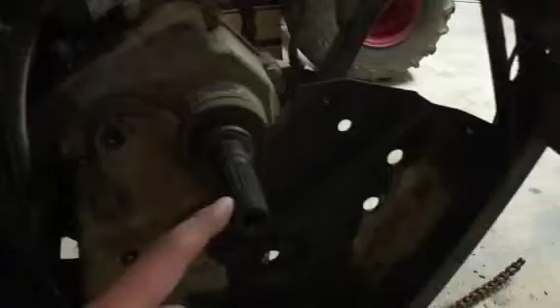Getting off this shaft, there are no instructions at all inside any of your manuals. Even forums don't have it, but YouTube does, and I should have checked there first. Thanks, Uncle Bill. Basically, you spray the shit out of this with a PB blaster, let it soak for a couple minutes, and then it should slide off.

This ATV was taken through so much mud and dirt, and all this grime and shit came out of it, just out of that shaft.

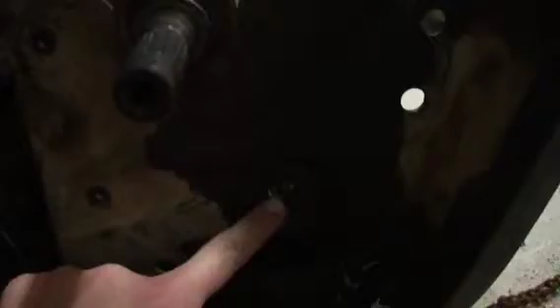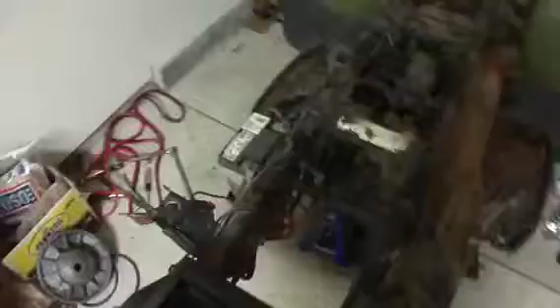But it came off, and I was able to get to that last bolt that had the swing arm on this system. I took the master link apart on the chain, and in order to get the rear axle out, I had to lift it up and hammer the rear swing arm as far down as it would go. Then I'd lift this tire up and pull it back, and it slid out like that. But this is where we are.

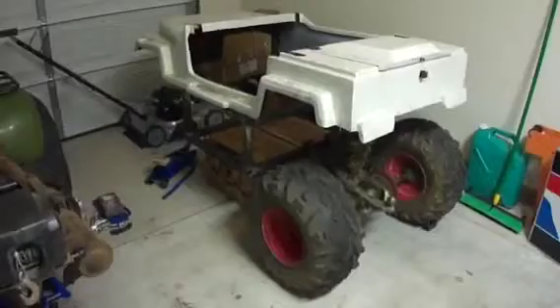It's very tall. I don't necessarily think it's going to be that tall, mainly because I don't have any bricks or anything to adjust my height.

But that's roughly where it might end up, just because that's where the shock actually hits the back frame here, and the swing arm hits the bottom of the frame, precisely where we want it.

This area right here, that's where we're going to be sitting. Our feet are going to be up here with the pedals and all that other stuff. But it's not welded in, it's not even bolted in, it's basically just set up against there.

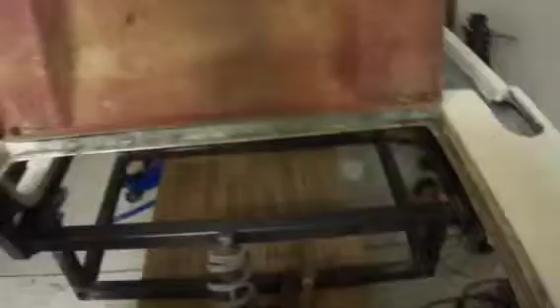I have something chocking the tires to prevent it from rolling, actually a little piece of metal. But this is pretty much the setup.

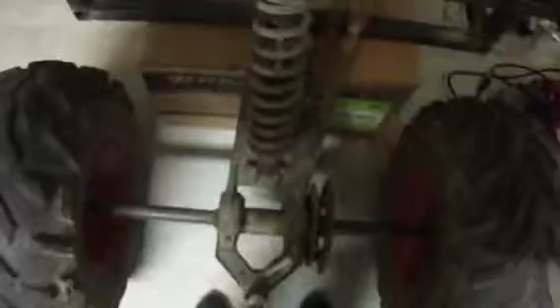It's the rear parts. I want to build two brackets to go on here, or I might build them out, or I might even build brackets facing out a little more, like a little frame box going around here, so we can push this whole assembly out a little more.

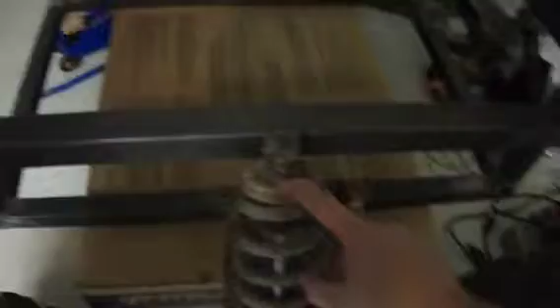Although it does line up pretty nice with the fenders of the frame. Even the shock, the spring suspension assembly, comes up nicely with the back bar where our backs are going to be.

So I might just build a bracket there, hanging off this face right here, facing like that, and bolt it to that. Of course I'll reinforce it a little bit, because that's where all the weight's going to be on the suspension.

But the next thing we need to worry about is getting a motor. I do want to stay with this motor here. It's a 2-stroke. I don't know how much horsepower, but a 400cc 2-stroke is going to be a lot.

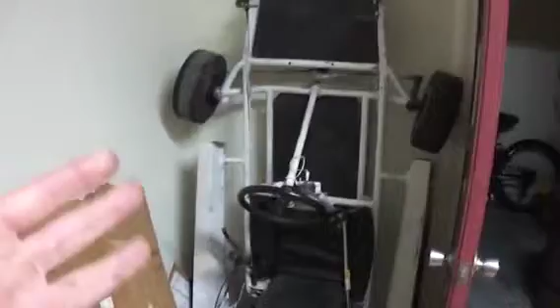If my dad's 80cc Yamaha 2-stroke can get this shifter kart up to 42 miles an hour with me on it, and that's only 80cc, then this 400cc 2-stroke should do even better. Even the speedometer on this thing, stock, goes up to 60.

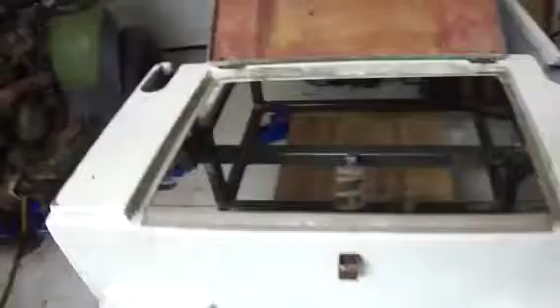So if we gear it right, maybe we can touch 70, 75, maybe 80. Maybe we'll hit 88 and go back in time and see Doc. Who cares? Who knows? I don't know. It'll be fun, kind of shocking that we show up in a 2-stroke Jeep.

Anyway, next thing is, after we bolt that and everything, since it sits so high, we have a lot of room to put a motor if we used this motor, this little 80cc motor. We have a lot of room.

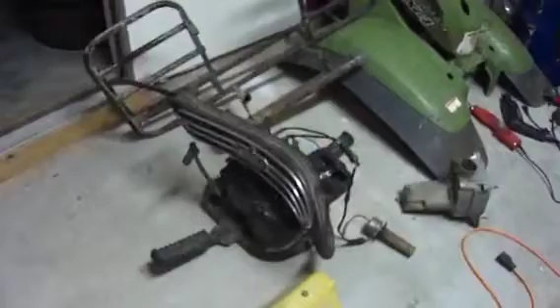The only problem with using that is my camera going out of focus. Focus.

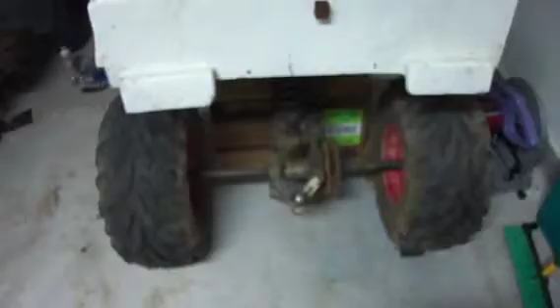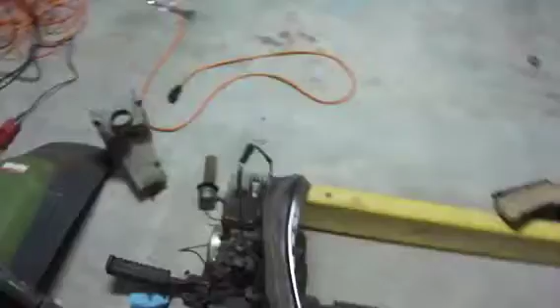The only problem with using that little motor is the sprockets on the passenger side of the motor. If we look at this engine, if that was in the go-kart, the sprocket's over here. So how would I fix that?

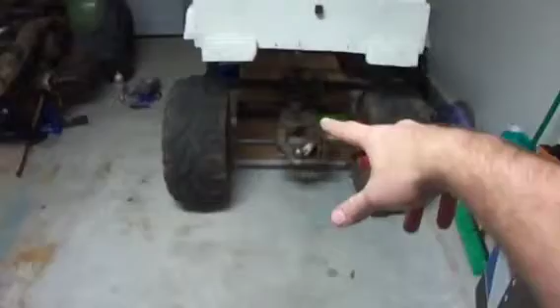Basically, take this whole thing, flip it, and then we'll take the ball hitch right here and just put it on the bottom. It'll still work the same. It's my go-kart, I can do what I want.

But if we use the 400cc go-kart motor, or the ATV motor, which I still have to get running, by the way, it's roughly 20 inches long, 16 inches wide.

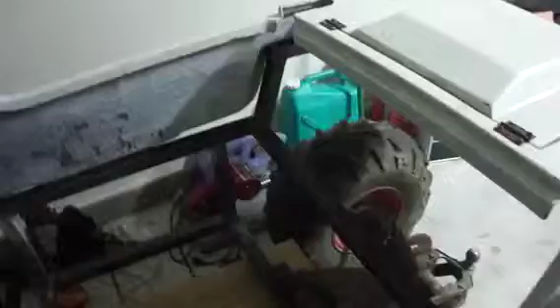So if we put that in here, that goes from back here and sticks out way out here. That would eliminate our ability to have two people riding in this thing, which is a goal of ours.

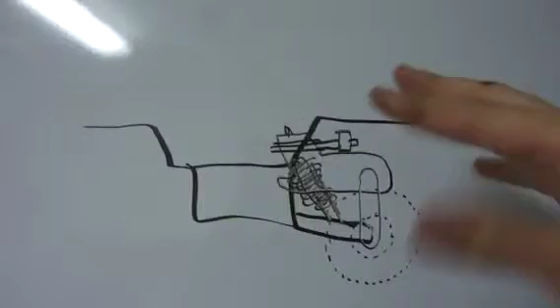So how would you fix that? Well, if we had the go-kart set up with that motor, just level as it sits in the ATV, that's where it would come, pretty much, roughly. It would stick out, and it would be pretty hot right next to your right arm. We'd have to build a guard and everything.

But why couldn't we just cant the motor and tilt it up? Well, the problem with that is the carburetor wouldn't sit level, and the fuel would just pour out.

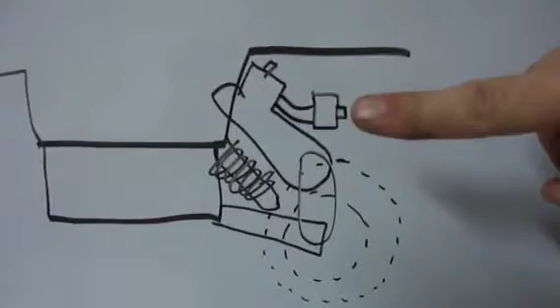We can make a, this is the carburetor, by the way. Right here, this is the carburetor, and this is the spark plug. But anyway, we could build a little pipe, or build a tube.

I've got a pipe bender over there, so I can build a little tube or a jet tube or something. I can have it coming this way, or coming up, whatever way I want. As long as that carburetor is level and this two-stroke is sucking in air, pretty sure it'll work.

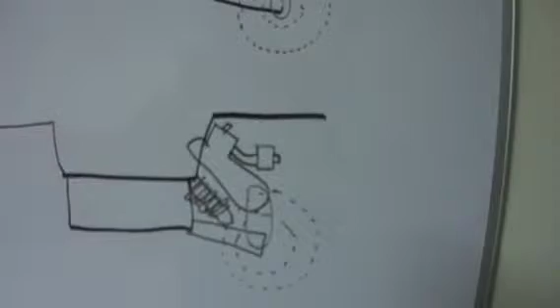That way the chain can still drive this whole system, which I didn't think about. Now if I make that motor stationary, this chain moves, it's gonna snap. That is a conundrum. I did not think about that.

Well, I did in one of the original videos, but that was for the 80cc. I will have to come back to that.

Anyway, that's the progress. I'm pretty happy with it. I still need to build a small windshield because we'll be sitting pretty deep, we're not going to be sitting that high. So a small square windshield.

And then I'm going to probably drill out some holes back here and here and build a box. We'll cover it with canvas and make it a nice little Jeep. But that's where we are, so stay tuned for the next videos, and hopefully we'll see this thing running pretty soon.